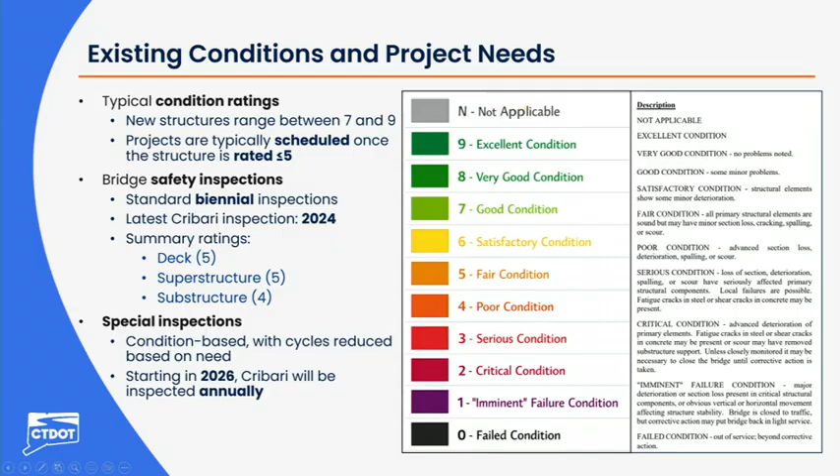Next, I will review several of the structural and functional deficiencies highlighted in these inspection reports. Structural and functional deficiencies identified in prior inspections include the damaged truss system with substandard ability to withstand wind loads, substandard vehicle lane width and height, non-crash test compliant guardrail system, and vulnerable mechanical and electrical equipment.

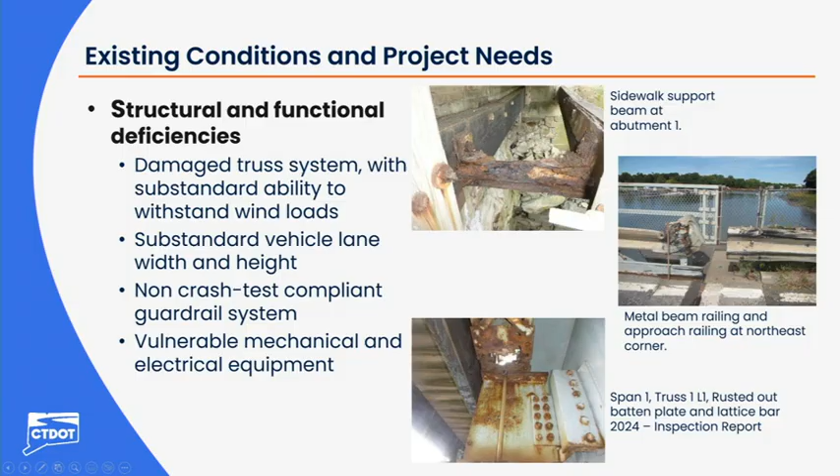Pictured on this slide, you can see a deteriorating sidewalk support beam at abutment 1, a damaged metal beam and railing, approach railing at the northeast corner of the structure, and the rusted batten plate and lattice bar at span 1, truss 1.

Structural and functional deficiencies also included, as identified in these reports, the 20-ton vehicular weight limit, fracture critical end floor beams and box girder with rust and isolated section loss rated as fair, and several structural elements in damaged and/or deteriorating condition. Pier 2 and 3 piles have extensive spalling, or concrete deterioration, and exposed rebar, as well as steel piles. We'll show a few of these images here.

Pictured on this slide: the uppermost photo shows laminated rust on span 1, girder 7; spalling, or concrete deterioration, on Pier 2 west pile 1; and section loss, or loss of material, at Pier 2 east pile 1.

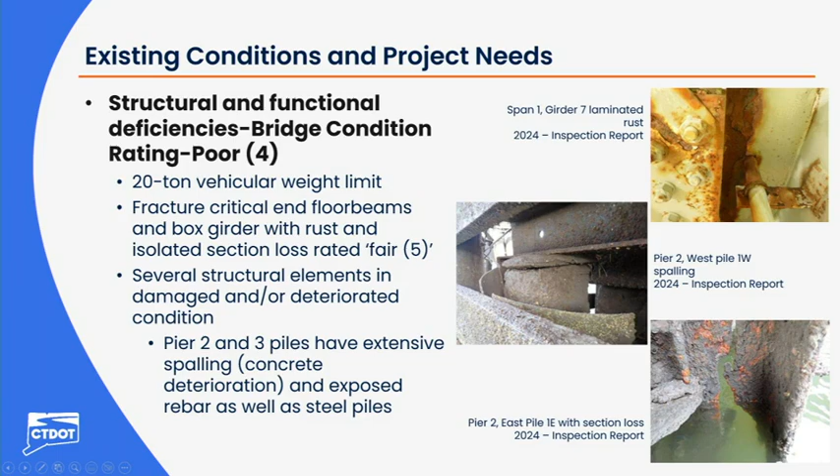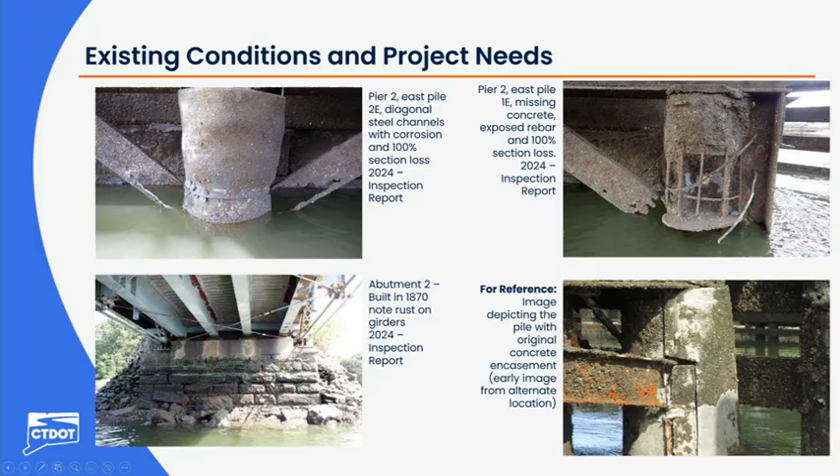The image on the lower left shows abutment 2 with rust on the girders on the underside of the structure. The pictures on the right, starting at the upper right, show missing concrete and exposed rebar on Pier 2 east pile 1E. As a reference image, the lower right depicts a pile with the original concrete encasement, a photo from an earlier image shown from an alternate location.

That's a little bit about some of the existing conditions, but we also want to touch on what we mean by the substandard design for vehicular, bicycle, pedestrian, and marine traffic. In terms of substandard design, it was noted in the EIE document that the sidewalk is not currently ADA compliant, or there is no sidewalk at all. No roadway or shoulder accommodates dedicated bicycle lanes. There's no solid roadway barrier gate system when the bridge is open, and there's low vertical marine clearance and time-consuming openings.

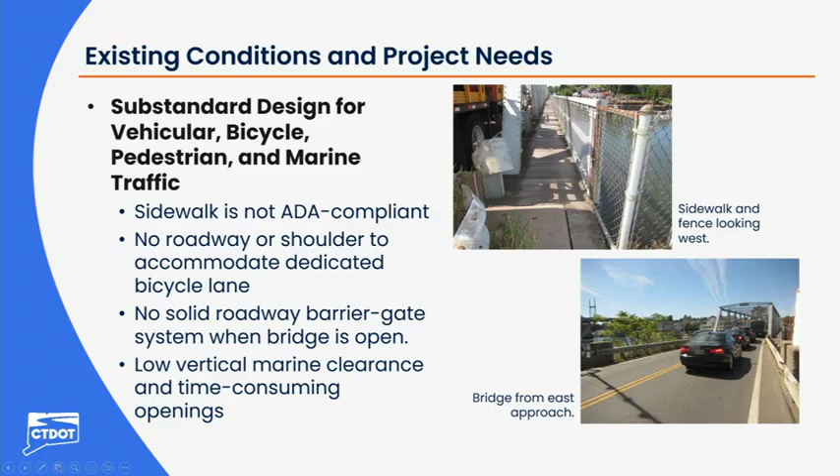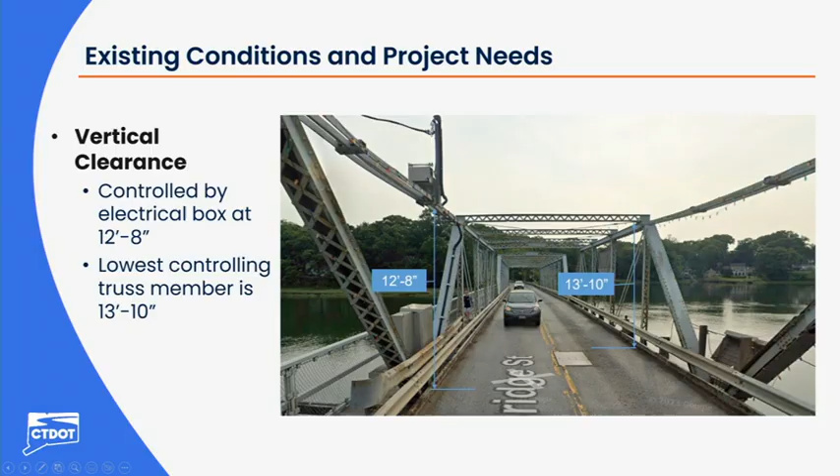The vertical clearance is controlled in part by the height of the existing electrical box, which, despite this photo and the depth of field of the image, is at a height of 12 feet 8 inches. It's also partly limited by the existing spanning member shown more in the background of this image, which is at a height of 13 feet 10 inches.

So that is just a quick review of some of the existing conditions and some of what was evaluated as part of those inspection reports.

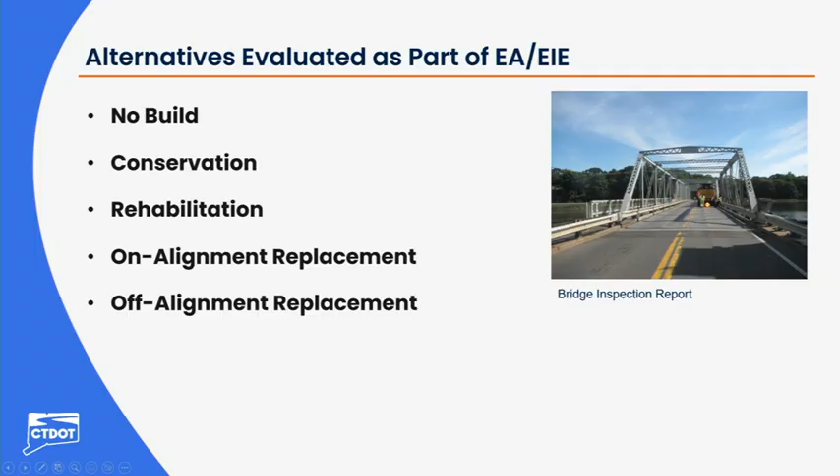Now I'll talk a bit more about the project alternatives developed through the NEPA-CEPA process and described in further detail in the EIE document. Overall, there were 5 alternatives evaluated and included as part of the EIE document. These include the no-build alternative, and then 4 build alternatives: the conservation alternative, the rehabilitation alternative, and the on and off replacement alternatives. Next, I'll briefly describe each in turn, highlighting key elements of each, which are also reflected on the boards out in the lobby.

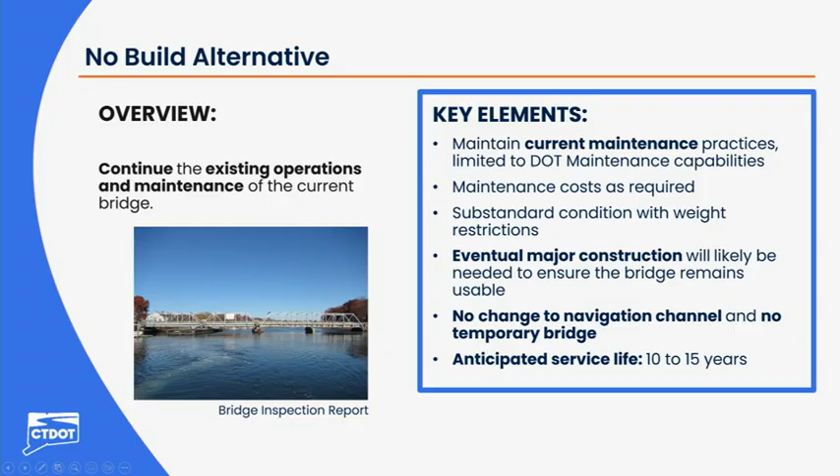Under the no-build alternative, existing operations and maintenance could be continued. This was used as a benchmark to evaluate the other 4 build alternatives included in the EIE document. Under the no-build alternative, the department would maintain current maintenance practices within the limits of its capabilities, incurring additional maintenance costs as required. It's anticipated that there would be no changes to the navigation channel and no use of a temporary bridge. It's also anticipated that the structure could have a service life estimated between 10 to 15 years, but may eventually require major construction to ensure that the bridge remains usable.

Now to talk about the 4 build alternatives, starting with the conservation alternative. This is one of the 4 build alternatives evaluated as part of the EIE, and was developed in coordination with the PAC mentioned before. Under the conservation alternative, limited repairs would be implemented to restore the bridge to a condition similar to the 1990s rehab project and address some safety and structural needs.

Key elements of this alternative could include limited structural repairs to piers 2 and 3, repair to the damaged truss, and lengthening of Bridge Street's westbound right turn storage lane at the intersection of Bridge Street and Riverside Ave, to address vehicular safety and intersection flow. It's also anticipated that this alternative may require short-term closures of the navigation channel and use of a temporary bridge during construction. The estimated anticipated life of this alternative is between 25 to 40 years.

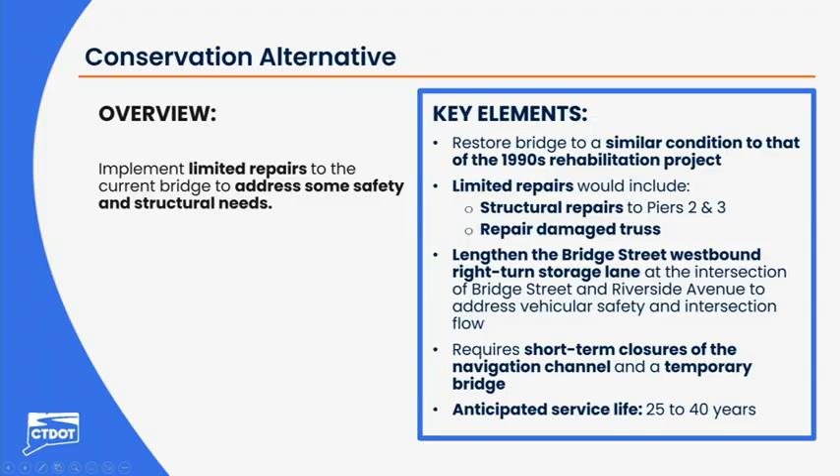Pictured on this slide are some visual representations of what the conservation alternative could look like. These images are pulled directly from Appendix B of the EIE document, the same appendix where you can find the visualizations shown on subsequent slides related to these alternatives, and they're also out on the boards.

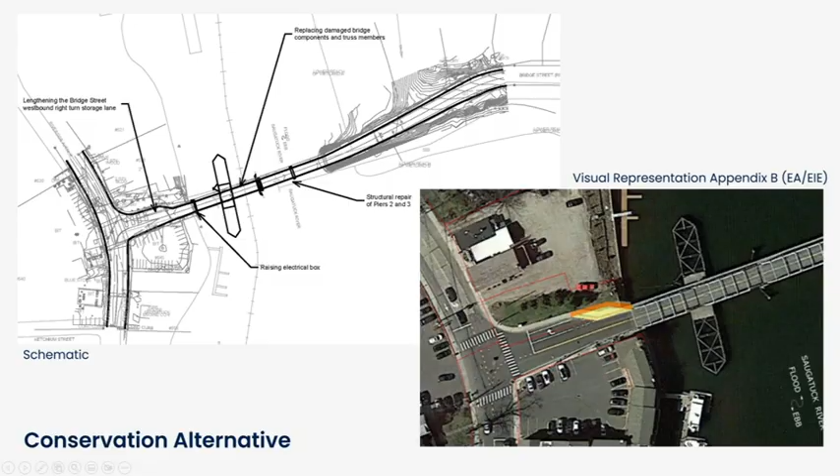The rehabilitation alternative is another one of the 4 build alternatives evaluated as part of the NEPA-CEPA process. Under this alternative, the bridge could be rehabilitated to address more of the safety and structural needs.

Key elements of this alternative include widening of trusses and increasing the vertical clearance, installing a MASH-compliant guardrail system, reconstructing or replacing the Pier 2 support system, patching the substructure and deck, replacing mechanical and electrical equipment, and replacing the fender system underneath the bridge to protect the piers.

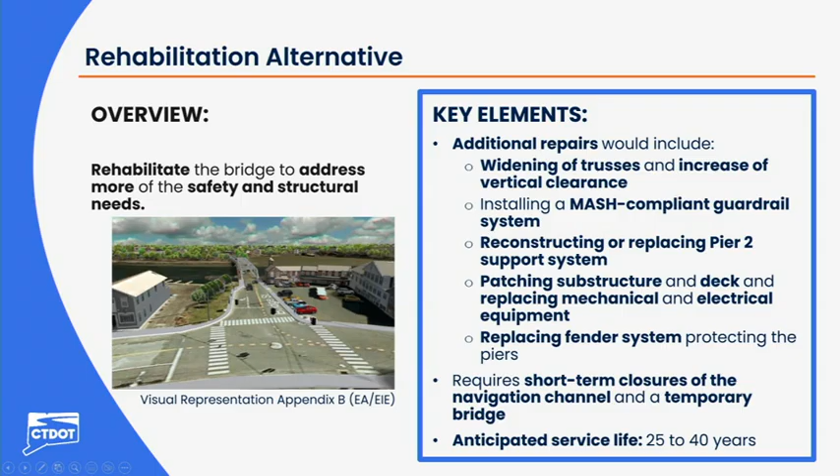Likewise, it's anticipated that this alternative would require short-term closures of the navigation channel and use of a temporary bridge during construction. The anticipated estimated service life for this alternative is between 25 and 40 years.

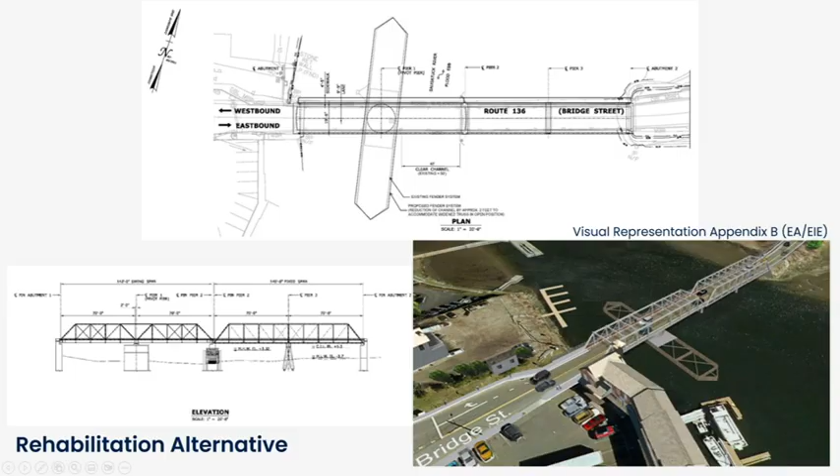I'll just flash this up on the screen momentarily. Pictured here are some visual representations of what this alternative could look like.

All right, now to talk about the two replacement alternatives that were included in the EIE. So this is the on-alignment replacement alternative.

It is one of the 4 build alternatives and one of 2 replacement alternatives evaluated in the document. This alternative is the department's preferred alternative. Under it, a new movable bridge could be constructed on the same general alignment as the existing structure, requiring removal of the existing bridge. This new bridge could be designed to meet current roadway, multimodal, and load standards, increase marine vertical clearance, improve bridge operations, and raise the mechanical and electrical equipment.

Similar to previous alternatives mentioned, this would also include the potential lengthening of Bridge Street westbound right turn storage lane. It's anticipated that this would require short-term closures of the navigation channel and use of a temporary bridge during construction. Importantly, this alternative could also allow the department to solicit interest in eligible off-site adaptive reuse of the historic bridge trusses. Overall, the anticipated service life of this alternative is estimated to be between 75 and 100 years.

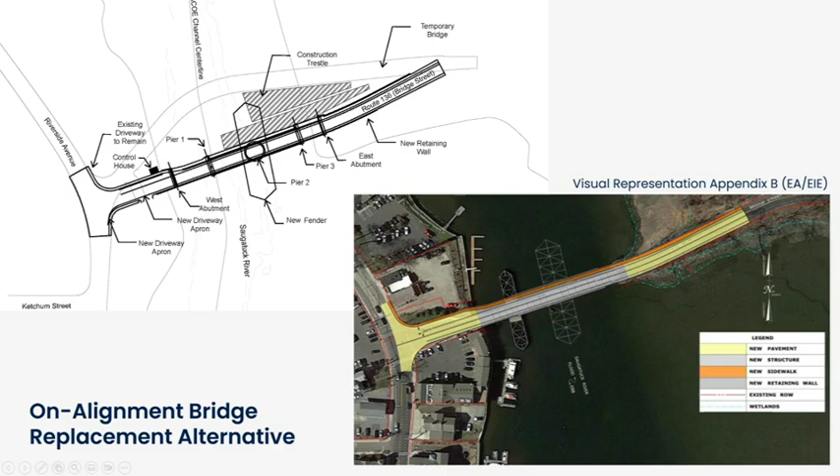Pictured on this slide are some visual representations of what the on-alignment replacement alternative could look like. If you want to spend more time with these images, they are on our boards out in the lobby.

Lastly, we have the off-alignment replacement alternative, another one of the 4 build alternatives and the other of the two replacement alternatives evaluated as part of the EIE document. Under this alternative, a new movable bridge could be constructed on an alignment just north of the existing bridge, which would require the removal of the existing bridge.

This new bridge could be designed, again, to meet current roadway, multimodal, and load standards, increase the marine vertical clearance, improve bridge operations, and raise the mechanical and electrical equipment. Similarly to some of the other alternatives mentioned, this would also include lengthening the Bridge Street westbound right turn storage lane. It's anticipated that it would similarly require some short-term closures of the navigation channel mentioned before, but is not anticipated to require a temporary bridge during construction.

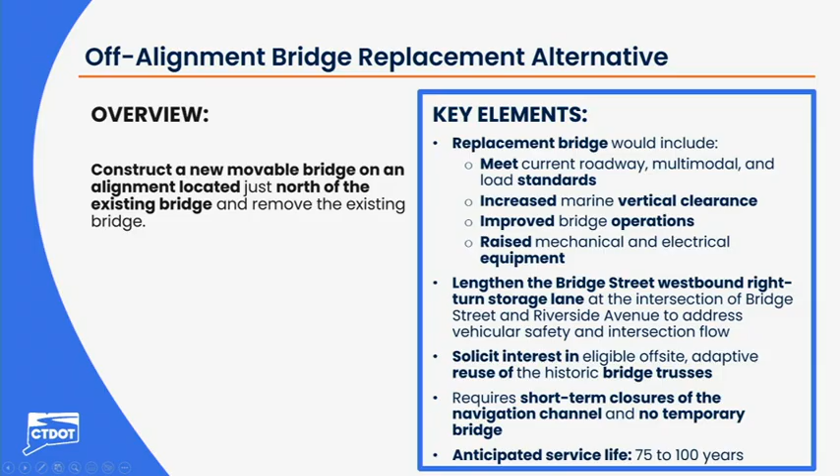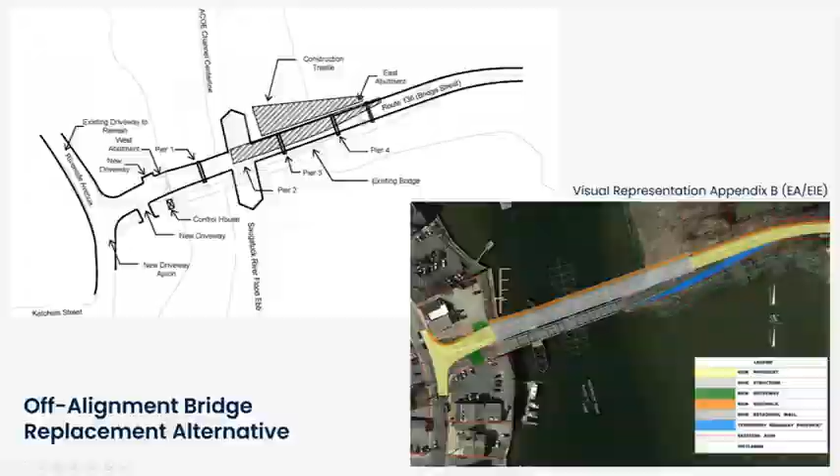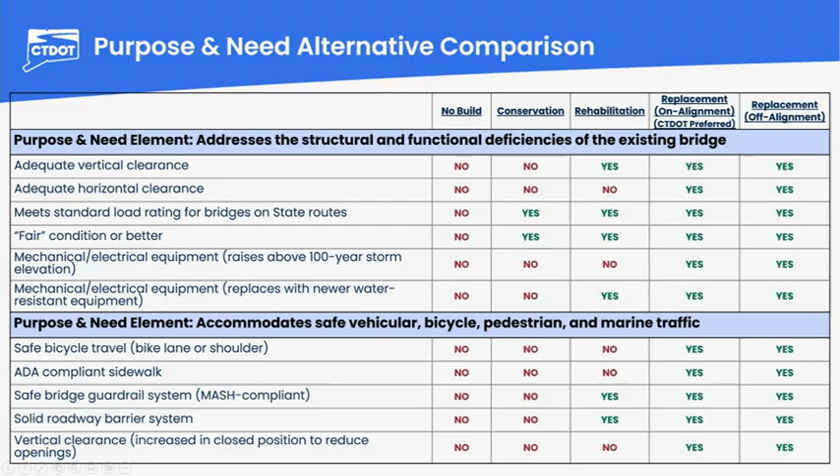The table on the screen, which you might have also seen broken out on some of the boards in the lobby, was included in the EIE, and it provides a summary of how each of the alternatives may meet or fall short of the parameters of the established purpose and need for the project. As demonstrated in this table, the alternatives evaluated as part of the EIE range from those that met none of the parameters, like the no-build alternative, to those that met all of the parameters, like the two replacement alternatives, which is in part why the on-alignment replacement was noted in the EIE as the preferred alternative.

In the section on impacts related to property acquisition, displacement, and relocation, no change or permanent impacts are anticipated with the no-build, conservation, rehabilitation, and on-alignment replacement alternatives. Fewer than 10 permanent partial property takings, a reduced parking area, and the removal or relocation of a private dock are anticipated with the off-alignment replacement alternative.

To mitigate against the potential negative effects from implementing these alternatives, temporary easements would be determined in consultation with property owners as needed, and fair compensation would also be provided to property owners for any permanent losses.

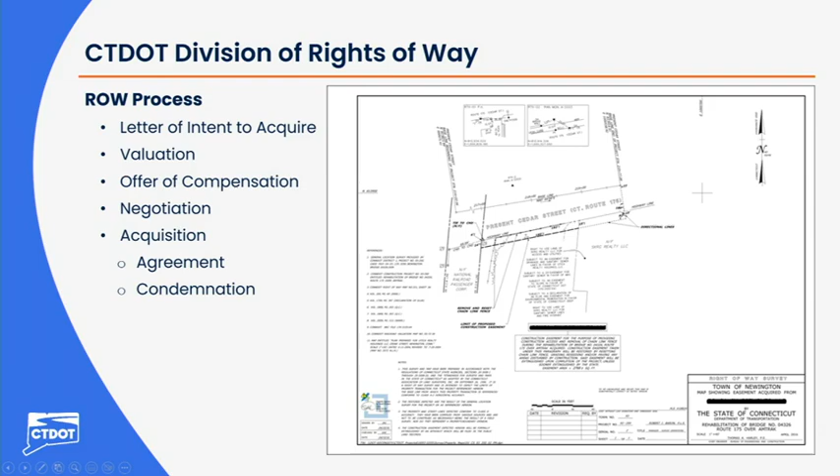Thanks, Kathleen. All right, so I'm going to jump back into the EIE document here and just touch on a few more of the sections related to the impact evaluation.

On the section related to traffic and transportation, operational and safety issues would remain the same or may even worsen with the no-build alternative.

The conservation alternative could be designed to meet standard load rating for bridges on state routes, result in a fair condition or better of the structure, and improve traffic operations. This alternative would not include the widening of curb-to-curb width or the existing sidewalk, no incorporation of bike lane or shoulder, have no installation of a MASH-compliant guardrail, and include no raising or replacement of mechanical or electrical systems with water-resistant equipment. Also no change to the vertical clearance of the marine navigation channel.

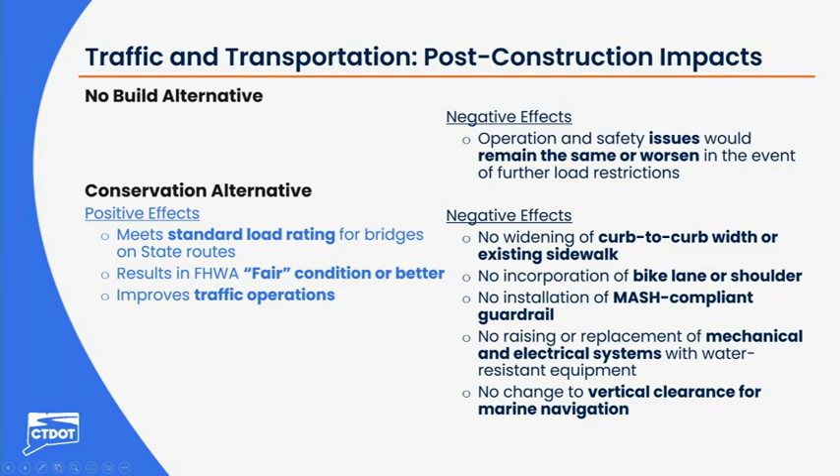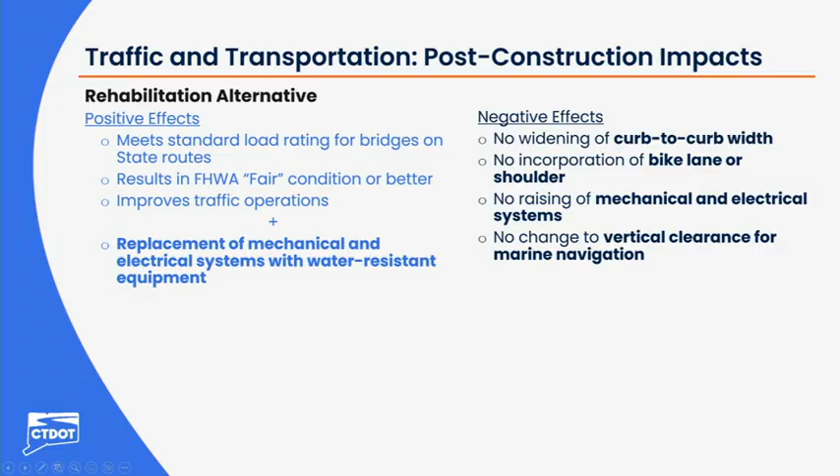The rehabilitation alternative could be designed to result in similar positive effects to the conservation alternative, while also replacing the mechanical and electrical systems with water-resistant equipment. This alternative would similarly not widen the curb-to-curb width. There'd be no incorporation of a bike lane or shoulder, no raising of the mechanical and electrical systems, and no change to the vertical clearance for marine navigation.

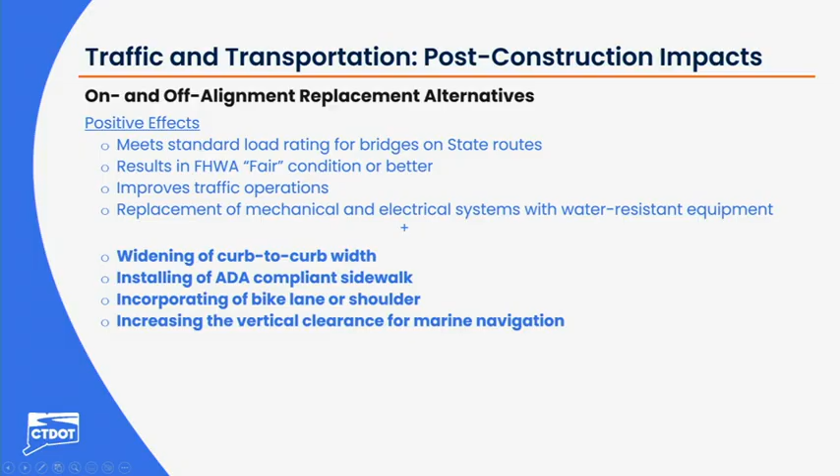Lastly, the two replacement alternatives could be designed to result in similar positive effects to the rehabilitation alternative just mentioned, while also including the widening of the curb-to-curb width, the installation of ADA-compliant sidewalk, the incorporation of a bike lane or shoulder, and increasing the vertical clearance for marine navigation.

To mitigate against potential negative effects from implementing these alternatives, mitigation measures include maintaining traffic operations and proactively communicating off-peak lane closures, in addition to using maintenance and protection of traffic, or MPT, measures and signage to ensure the safety of all modes of travel through the project site.

On the section related to public safety and security, it was noted in the EIE that there would be no anticipated changes with the implementation of the no-build, conservation, and rehabilitation alternatives. The two replacement alternatives could be designed to enhance mobility for emergency responders and improve pedestrian mobility through ADA-compliant sidewalk.

To mitigate against potential negative effects from implementing these alternatives, mitigation measures include using maintenance and protection of traffic, or MPT, measures and signage to ensure the safety of all modes of travel through the project site, and proactively communicating short-term restrictions of the navigation channel.

In terms of visual and aesthetic impacts, it's anticipated that there would be no change to the existing visual and aesthetic conditions, and that the visual impacts would be minimal for the conservation, rehab, and on and off alignment replacement alternatives, because the dominant visual features are not expected to change.

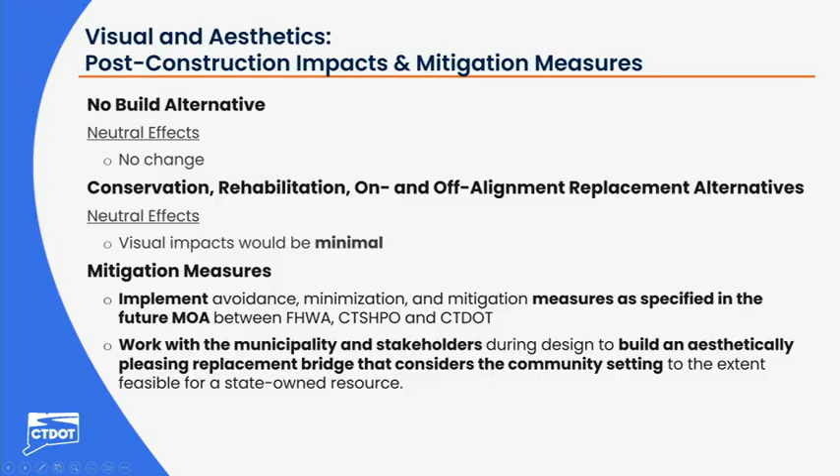To mitigate against potential negative effects from implementing these alternatives, measures could be taken to implement avoidance, minimization, and mitigation measures as specified in that future memorandum of agreement between FHWA, SHPO, and the department, and also working with the municipalities and stakeholders during the design process to build an aesthetically pleasing replacement bridge that considers the community setting to the extent feasible for a state-owned resource.

In terms of impacts to cultural resources under Section 106, it is anticipated that there would be no adverse effect associated with the no-build, conservation, and rehabilitation alternatives. The two replacement alternatives are anticipated to result in an adverse effect under Section 106, resulting from the removal of the historic bridge.

To mitigate against potential negative effects from implementing these alternatives, measures could be taken to again implement avoidance, minimization, and mitigation measures as specified in that future memorandum of agreement, and also conducting a marketing effort to solicit interest in eligible off-site adaptive reuse of the historic bridge.

It's important to note the department is still accepting comments from the public and consulting parties under Section 106, concurrent with this EA-EIE comment period.

While the department received no mitigation ideas following the last Section 106 meeting, ConnDOT would like to hear ideas for mitigation measures from the public and Section 106 consulting parties should one of the replacement alternatives be advanced for further design and construction. These comments will be taken into consideration by FHWA, SHPO, and ConnDOT in developing that memorandum of agreement.

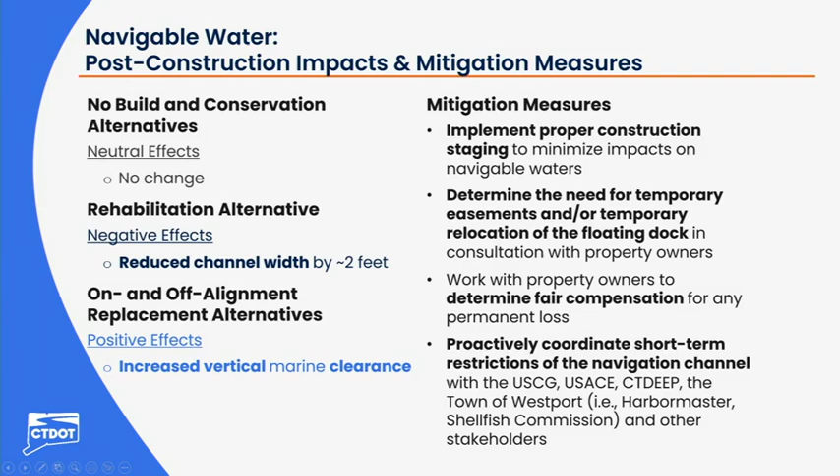As part of the requirements of FHWA's programmatic Section 4F evaluation for the use of historic bridges, a bridge marketing plan is included as an attachment to the Section 4F evaluation that is included in Appendix A of the EA-EIE document. If contractor laydown and storage areas are located within the Bridge Street Historic District, these areas will go through a Section 4F evaluation when they're identified.

All right, so a note on costs. As a complement to the narrative included in the EA-EIE on potential impacts and mitigation measures, with the resource areas outlined in that previous section, a cost comparison table was also included in the document, highlighting a range of costs associated with each alternative.

For the no-build alternative, as was mentioned earlier, maintenance costs will be incurred as required. It is estimated for the conservation alternative that costs could range between $49 and $54 million. For the rehabilitation alternative, between $50 and $55 million. For the on-alignment replacement, between $78 and $86 million. And for the off-alignment replacement, between $66 and $73 million.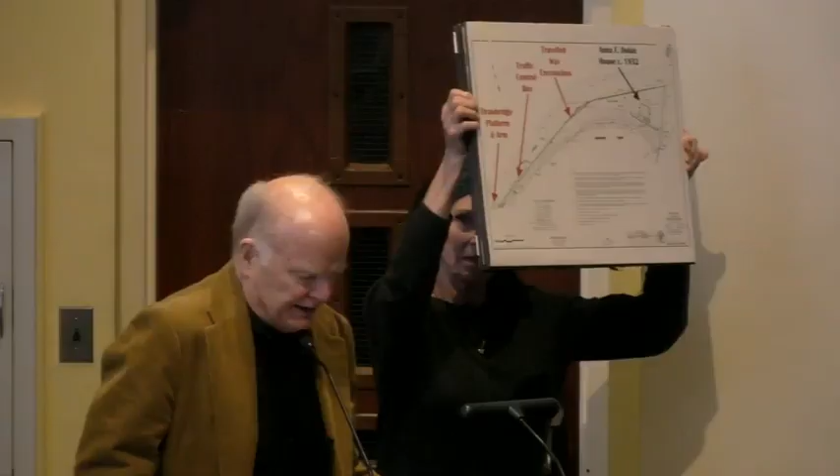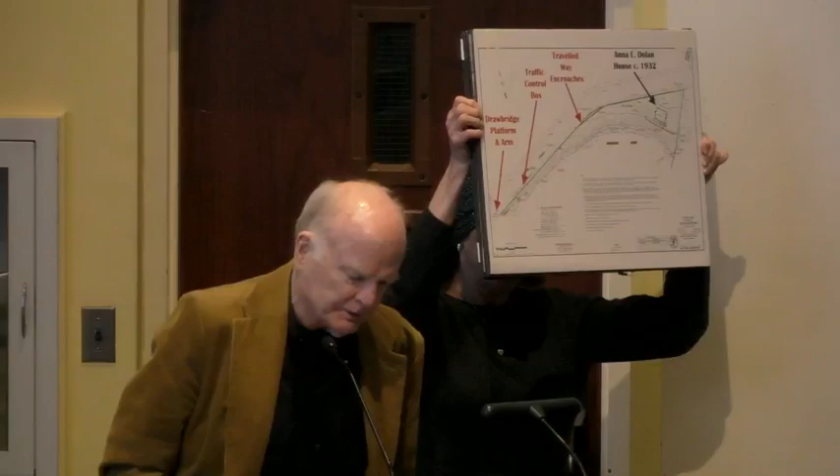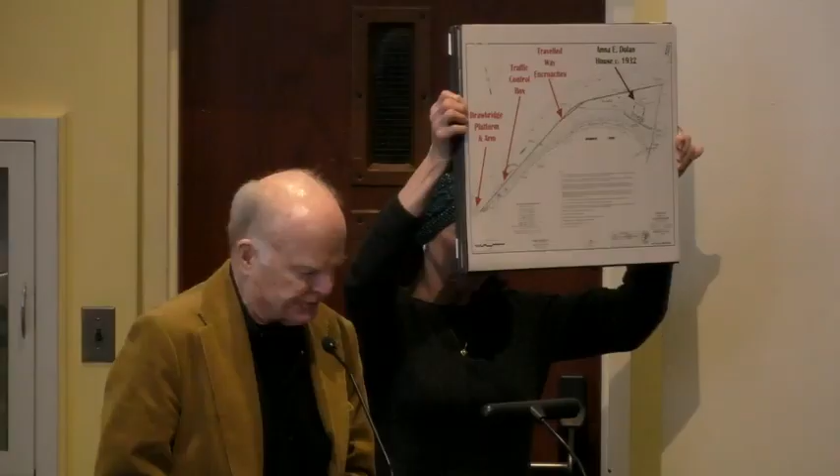I've owned the Anna Dolan House at 12 Bridge Street since 1995, and I've remained friendly with the surviving widow from the Dolan McGill clan that built the property back in 1932. The house was built by a man who later became the bridge keeper for our later-named Cribari Bridge. In addition to the house, the property, along with the riparian rights, extends via bucolic natural levee all the way to the Cribari Bridge platform and arm. About once a month, I stroll down this fluvial terrace to the drawbridge platform, and along the way gather Dunkin' Donut containers and empty whiskey bottles.

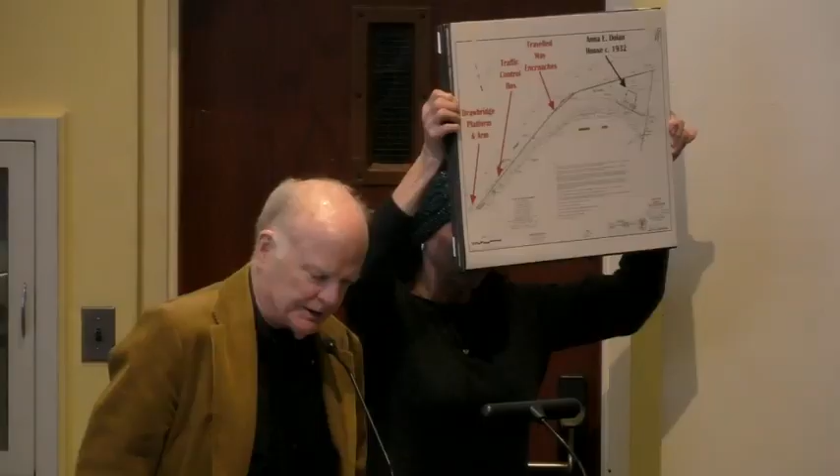During these strolls, I observe cars and trucks exiting the bridge and accelerating around the blind curve as much as 40 miles per hour. Maybe as a result of their haste, every few months there's a 2-car or sometimes a 3-car fender bender at our Imperial Avenue T-section in front of my Anna Dolan house. It often seems to me the only vehicles that obey the speed limits are Westport school buses. That said, there have been some recent crashes involving our school buses and cars, resulting at worst in only minor injuries, with the cars getting the worst of it.

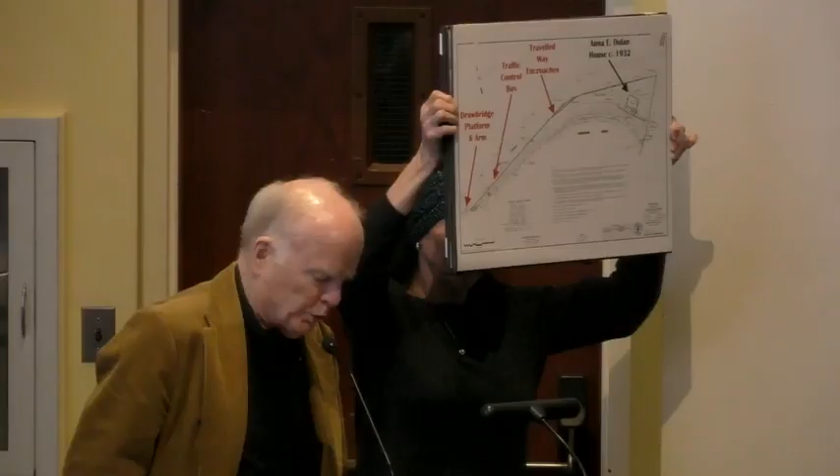So at present, Staples High School and our other town schools are far more fortunate than Tuscarawas Valley High School in Ohio, where a few years back an 18-wheeler failed to slow down and collided with their high school bus, causing a multi-vehicle chain reaction and fire resulting in 6 deaths and 18 injuries. Afterwards, Governor Mike DeWine said near the crash site, 'This is our worst nightmare when we have a bus full of children involved in a crash.' Our hearts go out in prayers to all the families, all those who were on the bus.

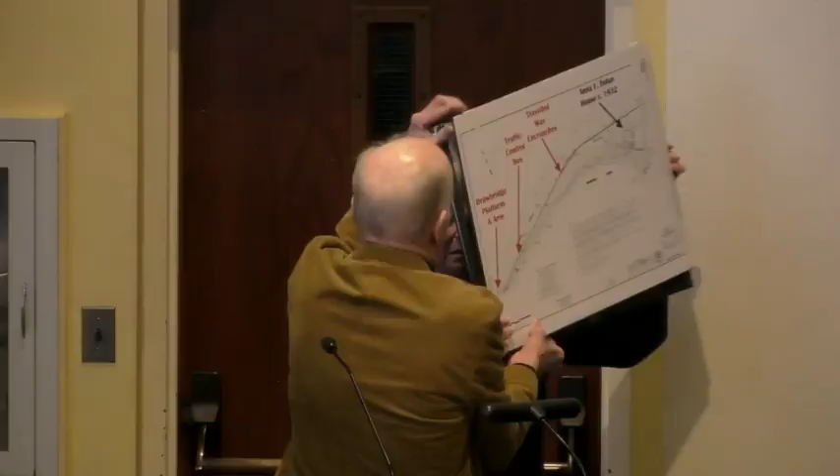There have been several collisions involving 18-wheelers and school buses reported across the U.S. this year alone, including major incidents with multiple children suffering serious and sometimes life-threatening injuries. Some years back, one of the deadliest school bus and truck crashes in U.S. history killed 18 children and a bus driver, and another crash resulted in 21 fatalities. We should all reflect for a moment on this.